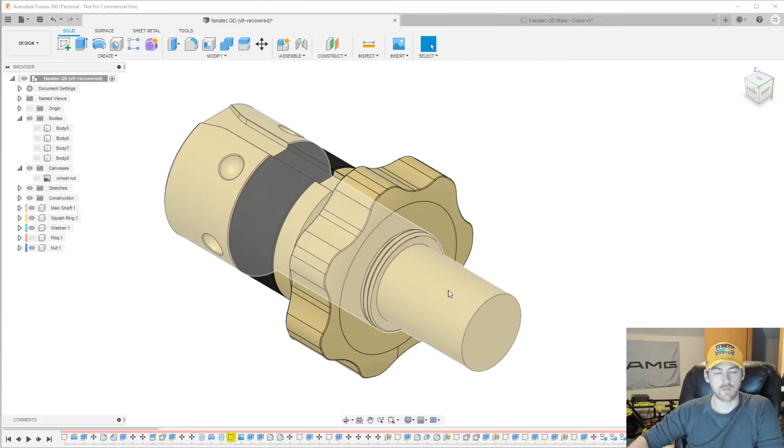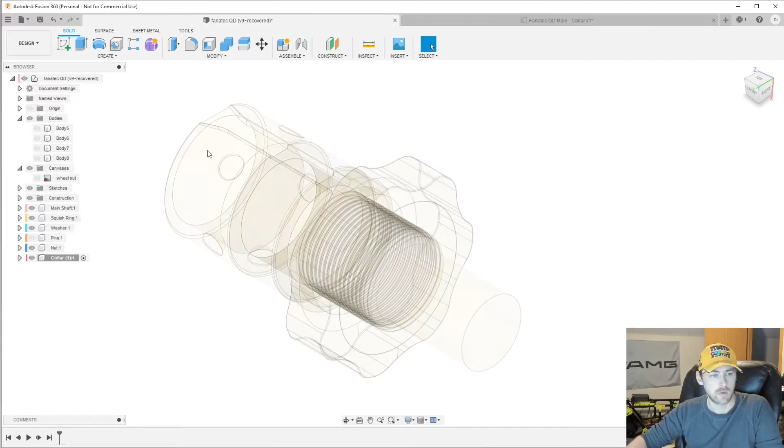So we know it clamps around this part of the main shaft, and this part of that shaft is, I believe, 30 millimeters. It's 22 millimeters. Okay. So let's create a new component. All right. Call it collar. Activate it. And let's do a sketch here.

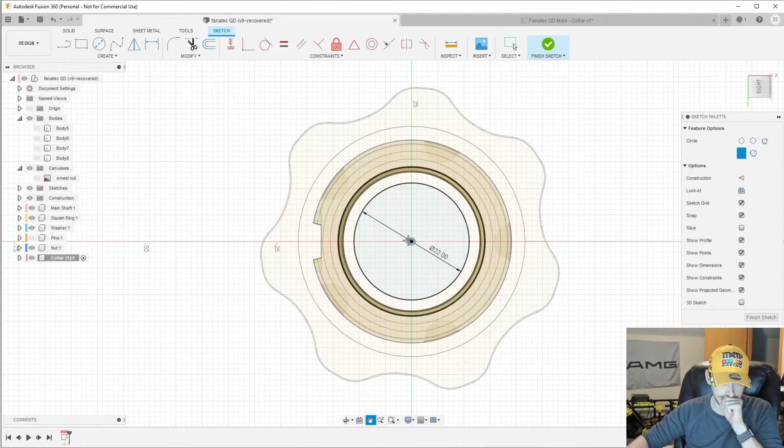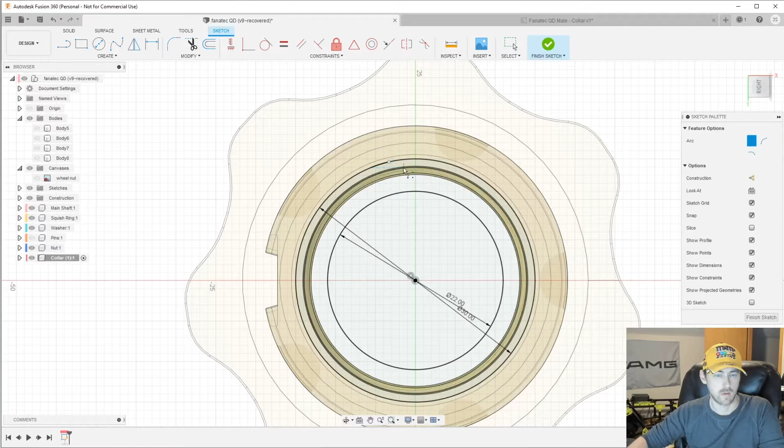22 millimeters ID and 30 millimeters OD. And there's a little cutout in it. You can see there. Well, it allows the clamp to clamp down on it. So let's just, we can do an arc. Oh, what happened there? I don't know why that is not taking. Let's do 2 lines. How about that? Okay.

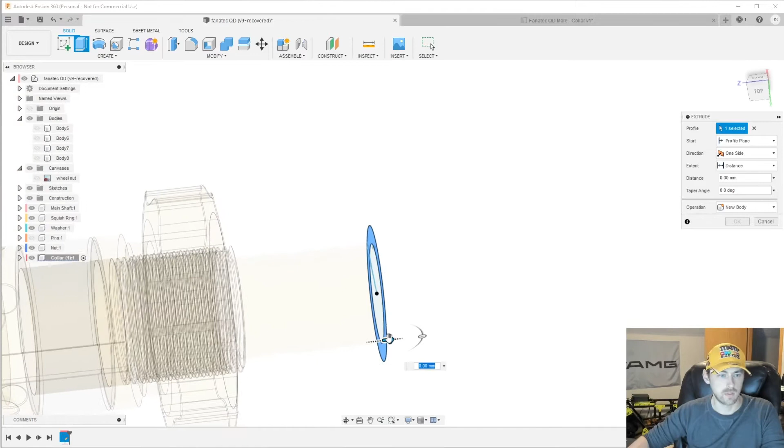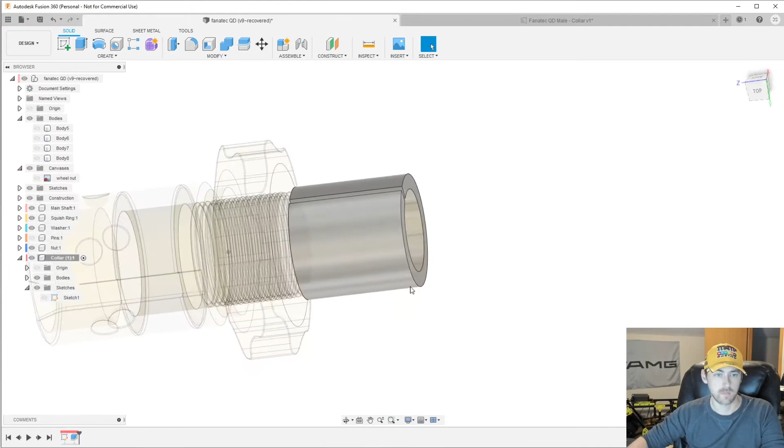Let's extrude this guy, and we'll extrude it all the way to those threads. Alright, that looks good. Alright. Hide that sketch, and that collar is created. Now the next thing we want to create is, the collar's created, we'll want to create the clamp next. So, create a new component.

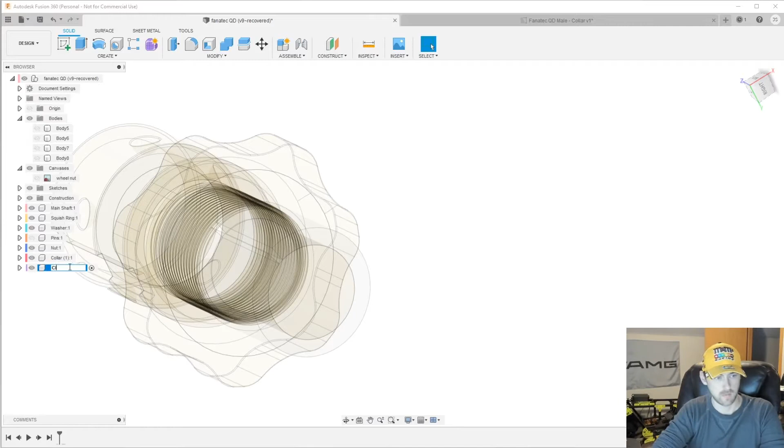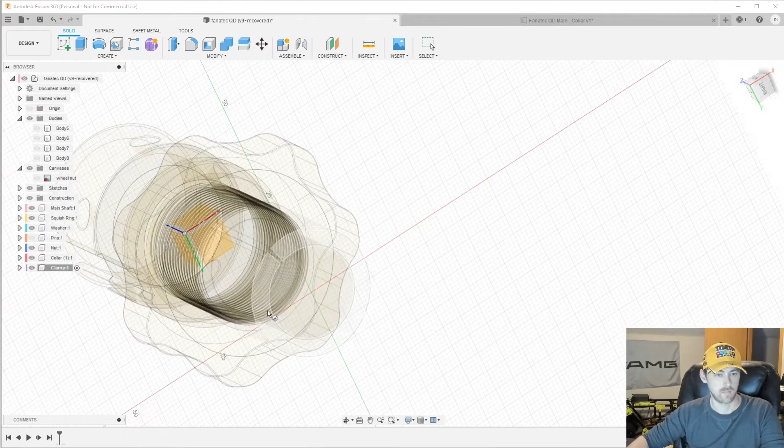Now that guy is, I think it's almost exactly 60 millimeter OD. These dimensions are a little bit off. 60 millimeter OD and 14 millimeter deep. We can do a sketch on this plane. 60 millimeter OD. And the ID will be, was it 30? Yeah, same as the OD of the collar there.

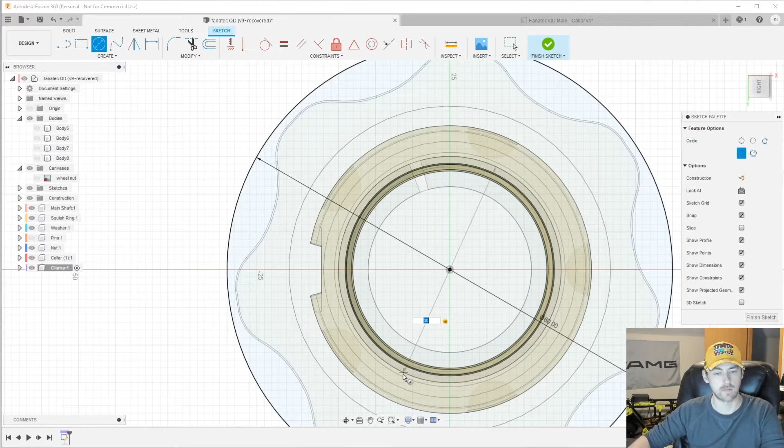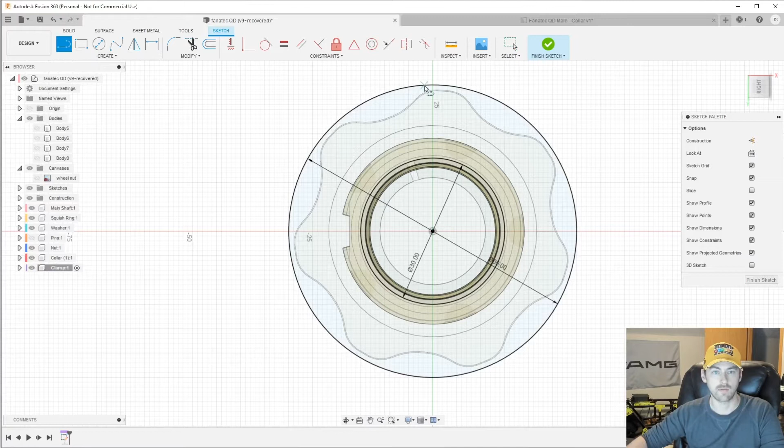All right, and as you can see on this clamp, it's 2 half clamps with a bolt on each side that are pulling them both together. So I'm gonna model half of one, and then we'll mirror it and flip the other side. So let's cut this guy in half. Trim the bits we do not need. Close off that sketch there.

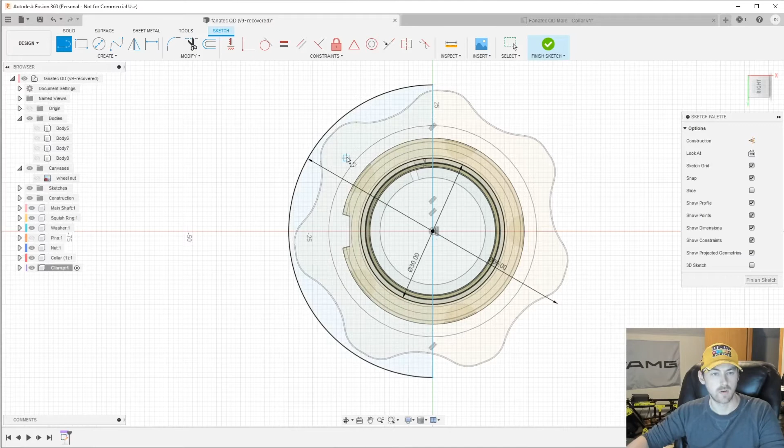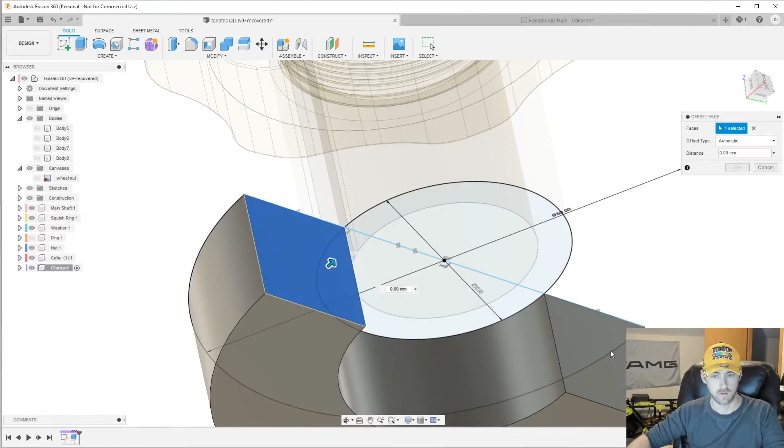And it was how thick? It was 14 millimeters thick. Okay, that looks pretty good. Move this back just a touch. As you can see, they're not going to be actually touching. Otherwise, they wouldn't do much clamping if they touched.

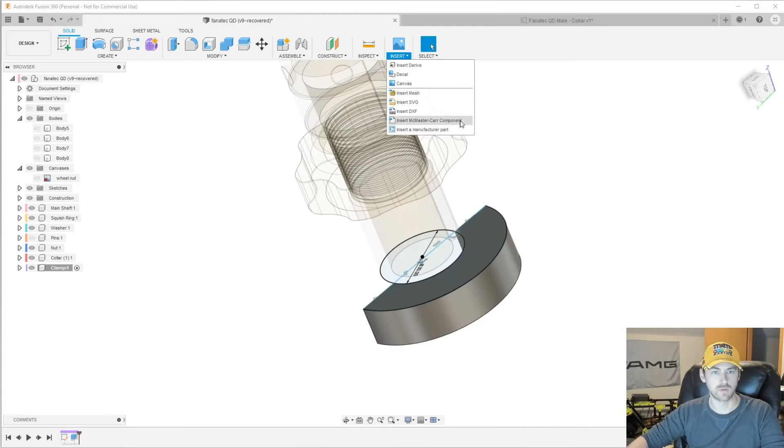So that looks good. Now I'm going to need to go to McMaster-Carr and insert one of those screws. I don't exactly know what material it's made out of, but I know it's a socket head screw. We'll just say alloy steel. I know it's an M6. I think it was 20 millimeters long. Okay, there we go.

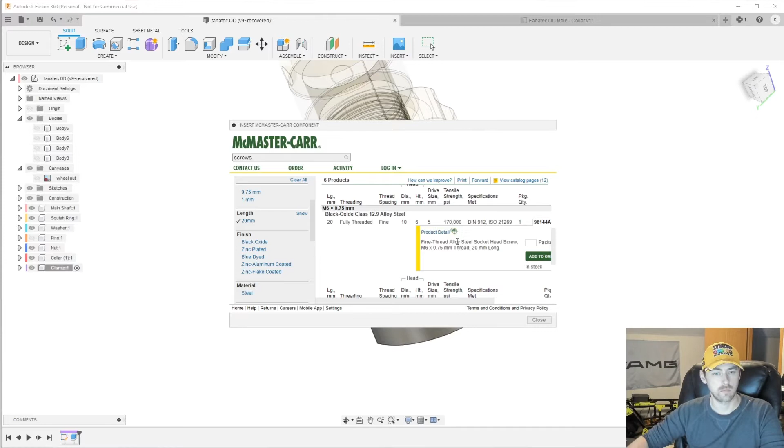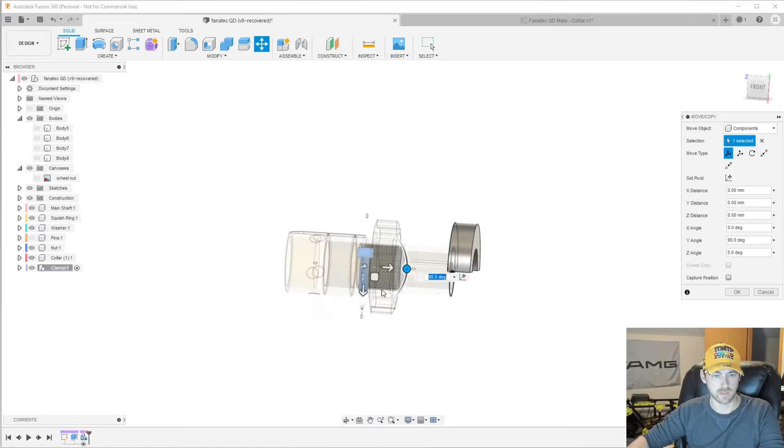Click on the CAD model page, product detail rather. Scroll to the bottom. Save it as a 3D STEP, and it will import as a new component into our design. Okay. We don't have to have it in its final resting place right now, but we can see it looks to be about the right size. Yeah, I think that was correct. I think it was an M6 by 20.

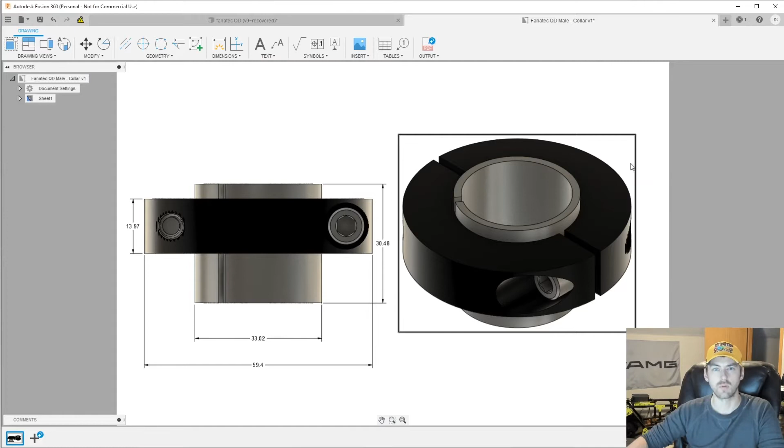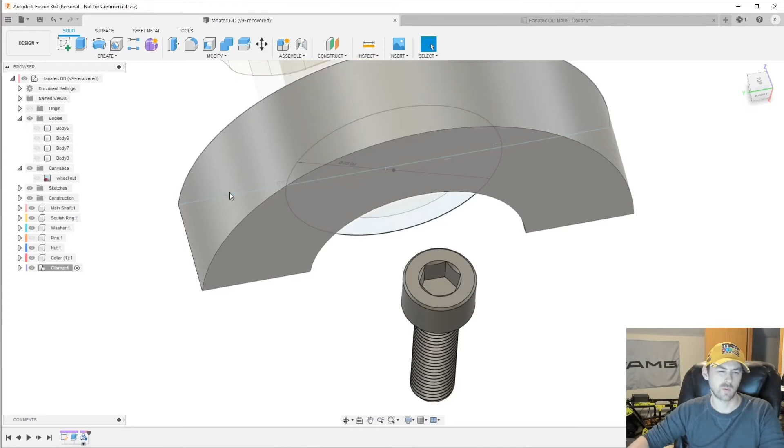All right, so end goal is we want one side of the collar. You can see the collar is the same piece, just flipped. So we've got a hole for the head of the bolt on one side, and on the other side we've got a threaded hole for the bolt to thread into. So let's see the diameter. Oops, save this position here. The diameter of the head of this guy is 10 millimeters. So I assume we're going to want about an 11 millimeter hole for it to sit into.

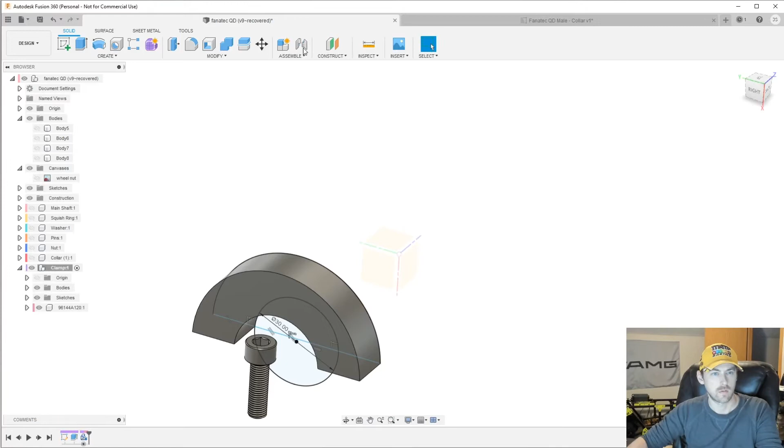So let's do. Let's look at the origin here. Let's hide all this other junk. I'm going to do an offset face to do that sketch on. All right, offset plane. Send it up here. That's high enough. Okay.

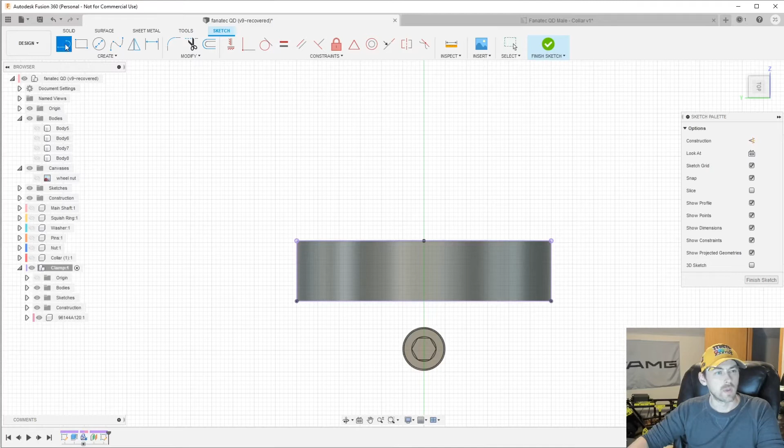Do a sketch. Hit P for project sketch. And grab the outside dimensions of the part. Now we can do a construction line down 45 degrees. And another construction line 45 degrees.

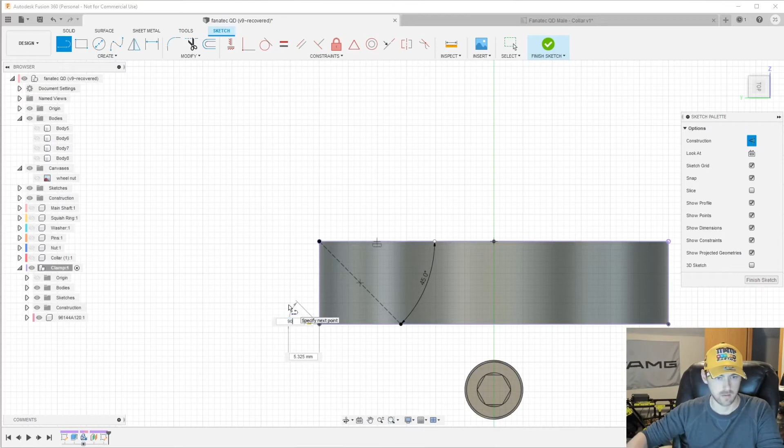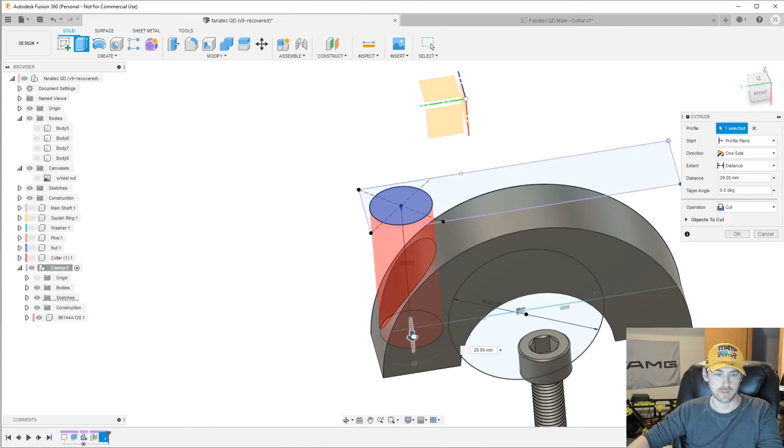There we go. All right, so I did those construction lines, so I can perfectly center a center diameter circle here, 12 millimeters in diameter. And we're going to do an extrude on that and send it down most of the way through, but not all the way.

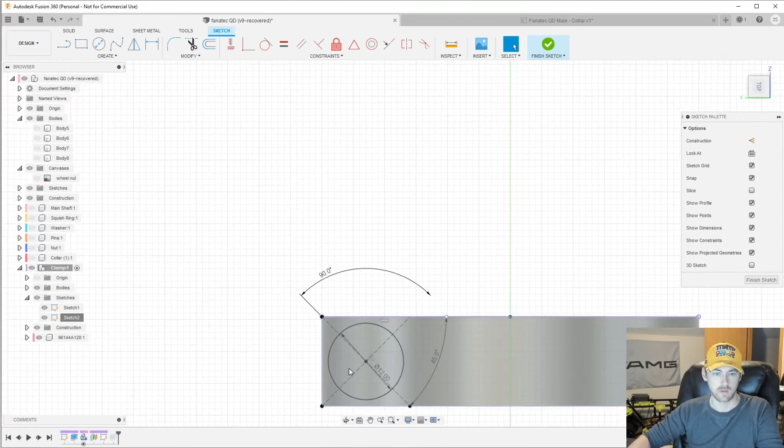Okay, I want to go back in and edit that sketch. And the threading of this bolt was 6 millimeters. So we can just do a 6.5 millimeter circle there and extrude that down through the part as well. So you can see the bolt will quite happily fit into that little opening there.

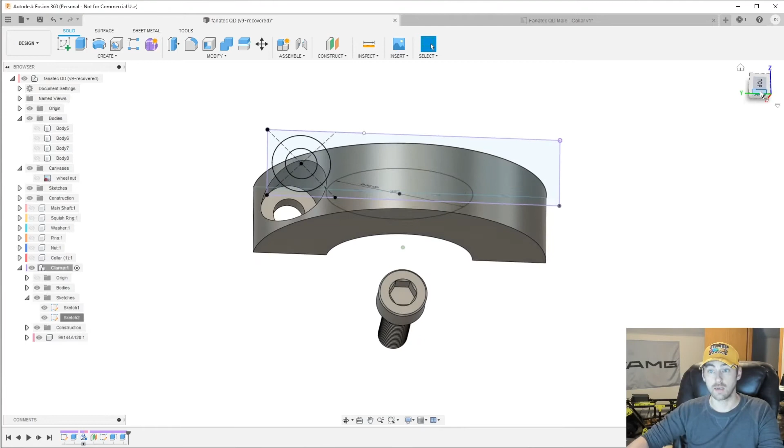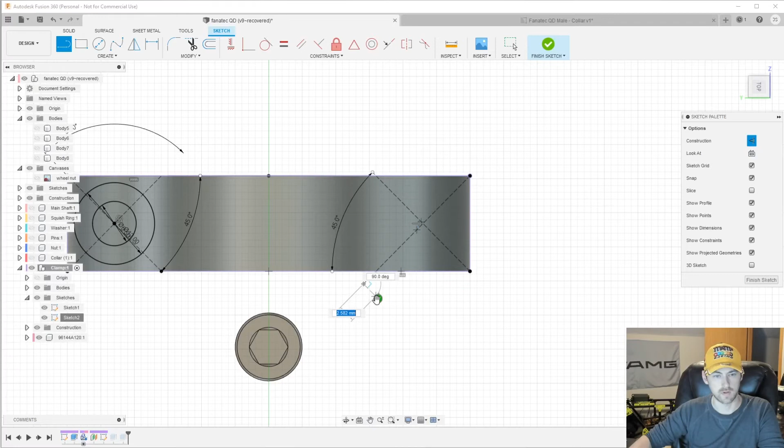Now on the other side, we want to do a 6 millimeter hole centered along the edge here. So we're going to go back into that sketch, edit it, make some more construction lines. 45 degrees. Okay. Degrees. And a center diameter circle here, say exactly 6 millimeters. And extrude that. Oops. Sorry.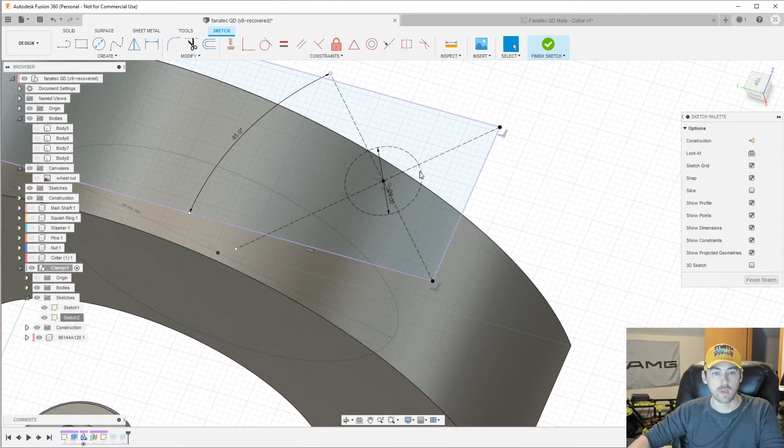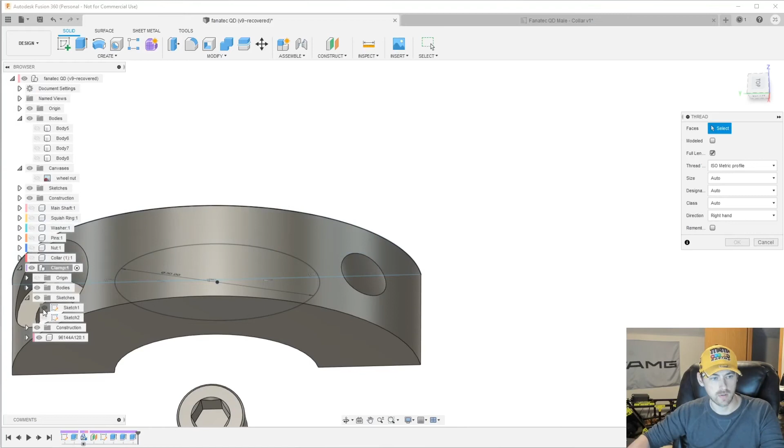That circle I made was set as a construction circle and not an actual sketch feature. I'll just redo it. There we go. All right, so extrude it all the way through. Go ahead and create our threading. Hide that sketch, hide the other sketch. Click on the inside face of that hole. Say we want it modeled.

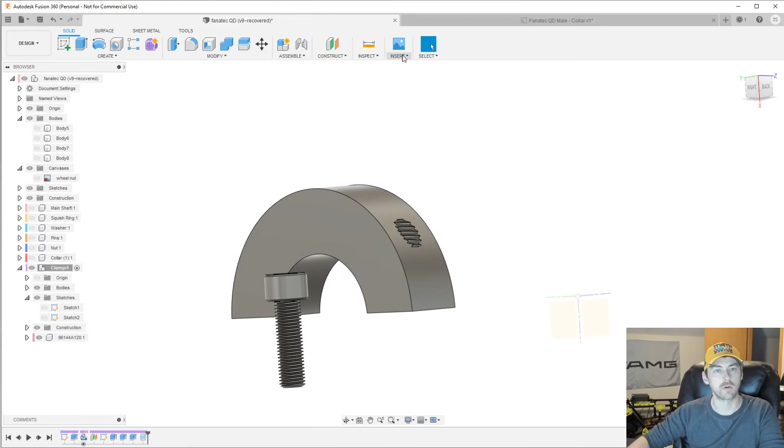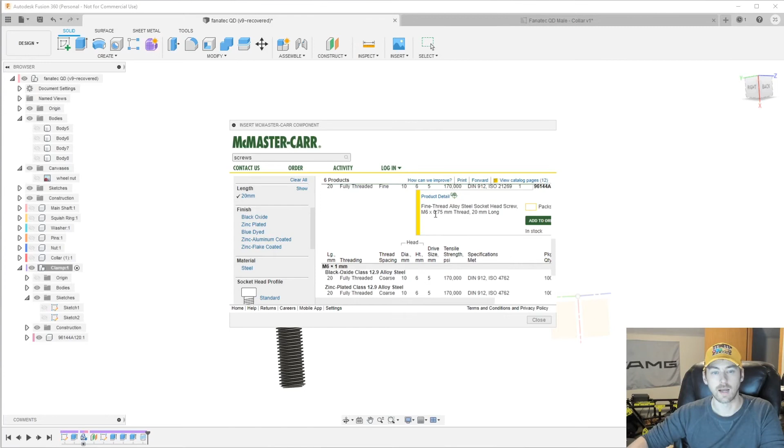It was 6 millimeter by, I don't recall the thread pitch. I think it was just 1. Shame on me, I don't recall. Of course, we could pull this part up though. Let's do that. It was an M6 screw, 20 millimeters, and it was their first option. There we go. 0.75 millimeter thread pitch.

So we can go into our timeline here, edit this threading, 0.75 thread pitch. That looks more right. You can see there's a little slop there, but I'm not going to worry about that. Alrighty.

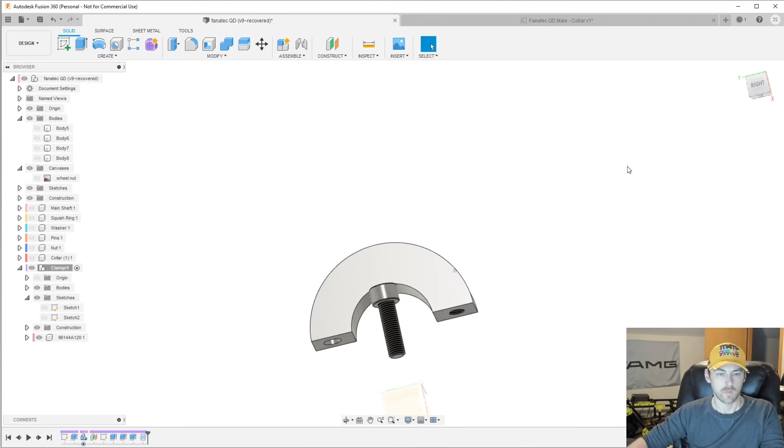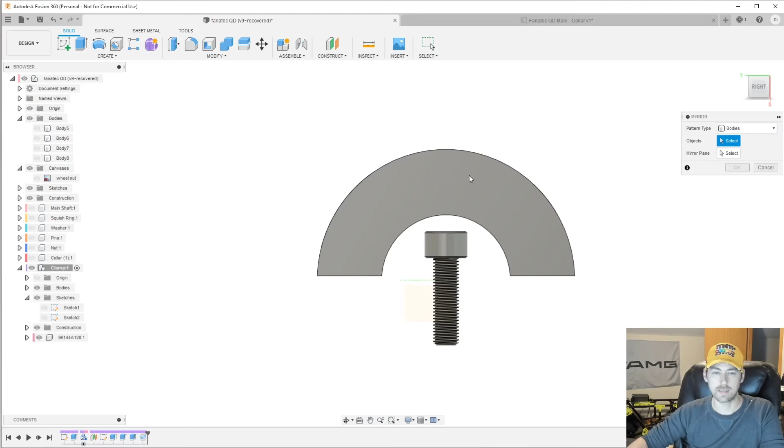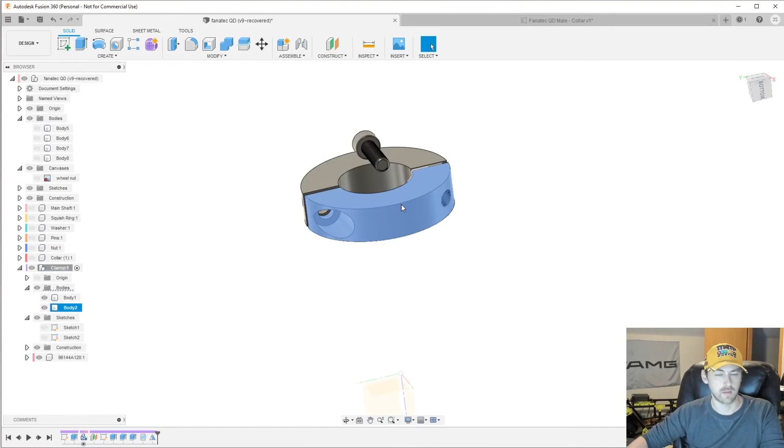Now I'm going to mirror this body along the x-axis here. Forget where mirror, yeah, there we go. Mirror, gonna mirror bodies. Mirror plane is the y-axis. Okay, there we go. Select body priority, select that body, rotate it. Come on. There we go.

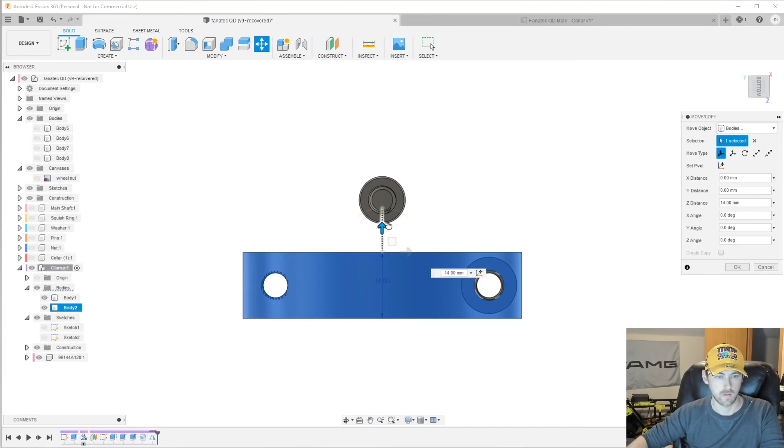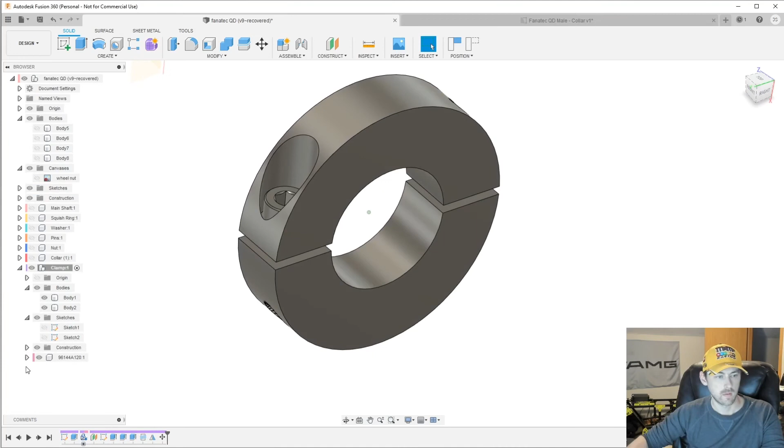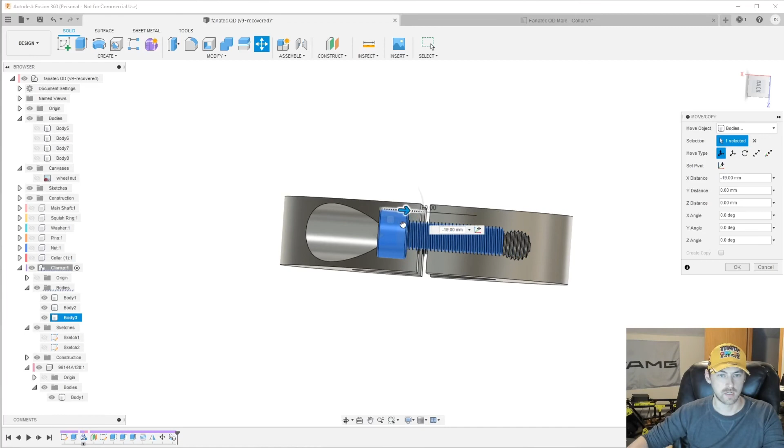All right, now you can see we'll move the screw into place. That looks really good. Go into that screw component. Copy and paste that body so we can make a second one. Rotate it. And we'll just move it over into place here manually. All right. That all looks pretty good. I think we're pretty close to done with this project.

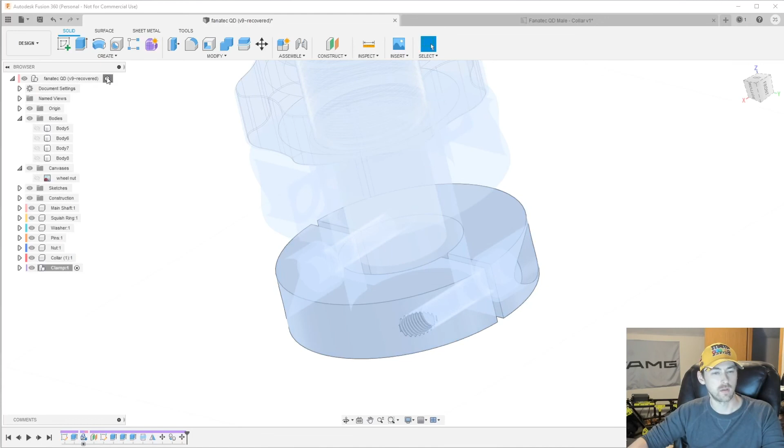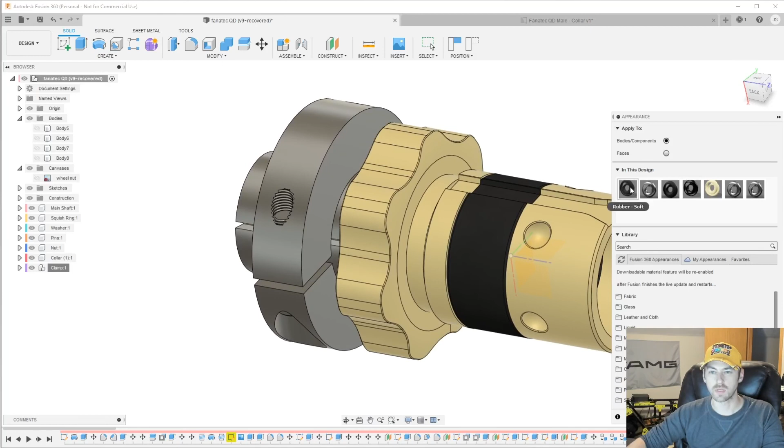Let's show all of the parts. Activate the main parent component. Let's see, the clamp needs to move up a little further. All right, great. So I created these textures, appearances already when I modeled this part in the first place. Yeah, there we go, there we go.

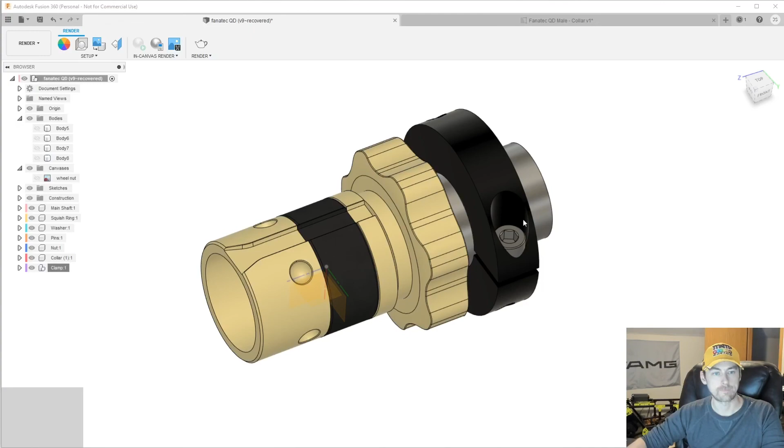Well, the screws, since they imported from McMaster-Carr, I think they just default to steel. We'll just leave that. This collar is actually steel, so we leave that. That all looks pretty good. Let's hop into the render viewport. Yeah, so that looks pretty good.